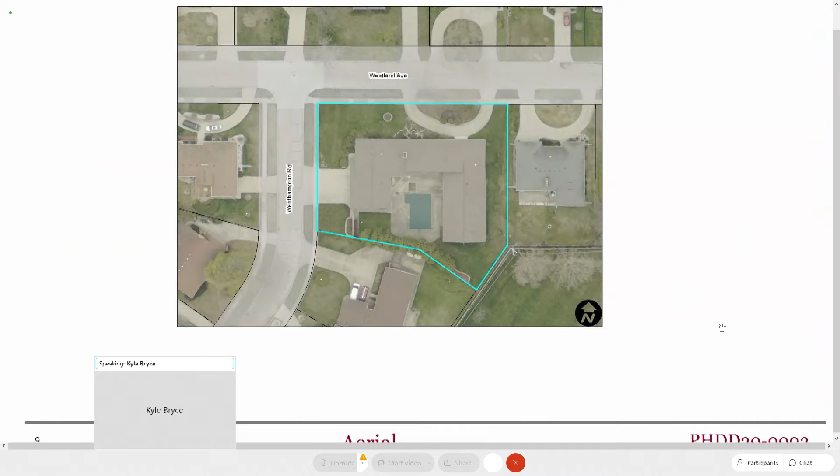Next slide. Here are some existing conditions of the house. Next slide. It's the front of the house.

This house was part of Northland Gardens, which was developed as part of the Northland Mall from J.L. Hudson. The entire neighborhood was platted in 1956 and built out by 1980. The neighborhood itself received National Historic District status due to its outstanding design quality, cohesiveness, and continuing historical integrity to its original mid-century modern design. This particular house, built in 1958, was constructed as one of the largest homes in the neighborhood. It has an asymmetrical U design with a courtyard in-ground pool.

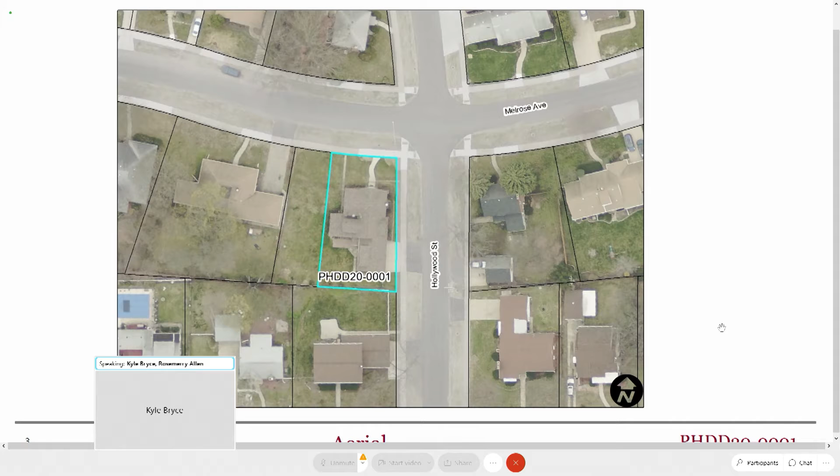Here's a bit of a closer up view of the house, showing it on the corner. Next slide, please. Here are the existing conditions of the Tudor.

Very briefly, this was built during a period of heavy population growth in the Detroit area. The builder, Roscoe Babcock, had a lot of experience constructing modern style homes in the area, things we take for granted today like electrical outlets and garages. But he eyed the Magnolia subdivision, which was in then rural Southfield.

Meanwhile, Don Loftus out of Cleveland was applying modern industrial techniques to home building. He patented the Permanesque style and formed Homes Permanesque of America in 1929. These houses featured steel joists, concrete floors, and steel frame windows. Wood was pretty minimal, and the homes were marketed as fireproof, vermin-proof, and low maintenance, stated to last 200 years. Mr. Babcock secured a Permanesque franchise and started building these homes in the Detroit area.

This house was built in 1930. Next slide, please. It was given a lot of fanfare in the local news, like the Free Press, getting a lot of visitors and press. It was pretty unique and revolutionary for its time.

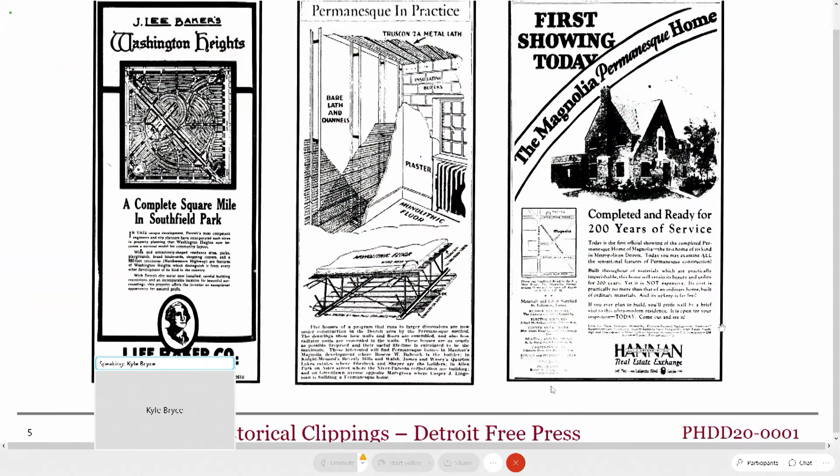Next slide, please. Are there any other questions about this property at this time? Okay, hearing none, I am going to open up the public hearing for this item.

So this is the public hearing for PHDD 20-0001 at 18405 Melrose Avenue. Hello? Hello, sir, you can go ahead with your public comment.

I had questions about this residence being provided with historic designation for a single resident. Is that something the city does frequently?

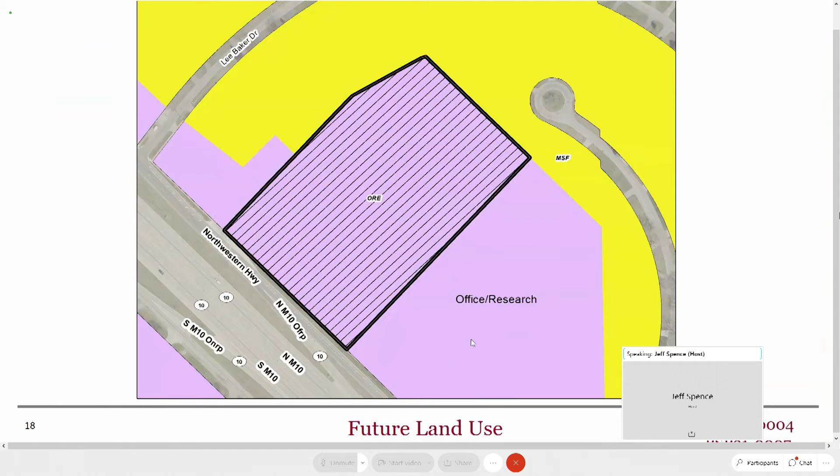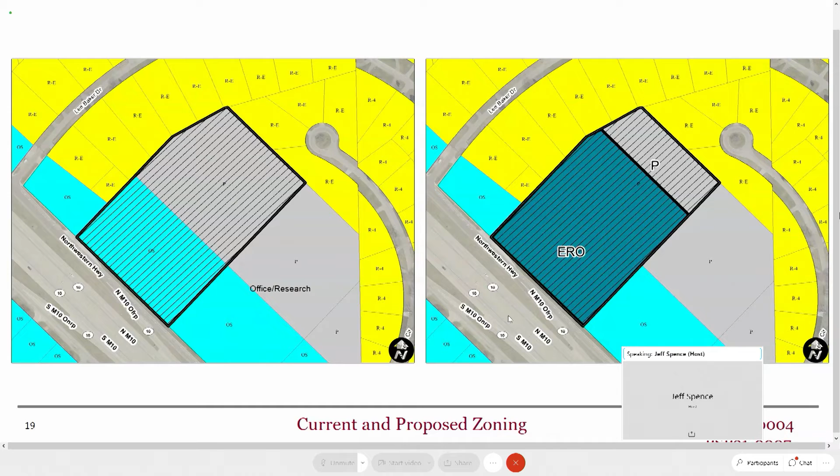Demolition, as noted, is part of this proposal to demo the portion of the existing building on the east side of the property. Then there would be reconstruction, or new construction, of a 43,000 square foot building addition where the parking lot is, basically to the northeast.

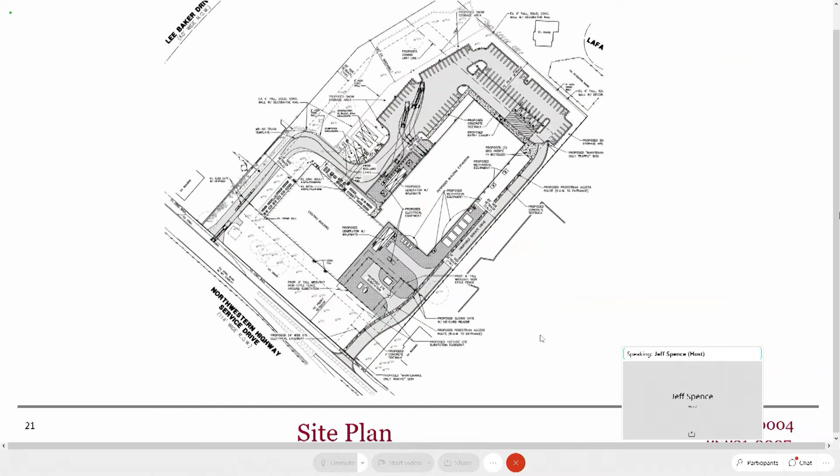The area directly south of where the new existing building would be located has a brand new proposed generator, as well as a DTE substation. Mr. Fisher, when he has his opportunity shortly, can let you know why a DTE substation was required for this particular site.

The landscape plan for the property includes additional trees along the northwest and northeast portions. Since the building is getting closer to the residential area to the northeast, we felt it important to have new landscaping there to serve as an additional buffer, as well as additional trees along Northwestern Highway to help screen the DTE substation. At our meeting a couple weeks ago, there was a concern about being able to see the substation from Northwestern Highway, so the petitioner has added additional landscaping to try to help screen that from the highway.

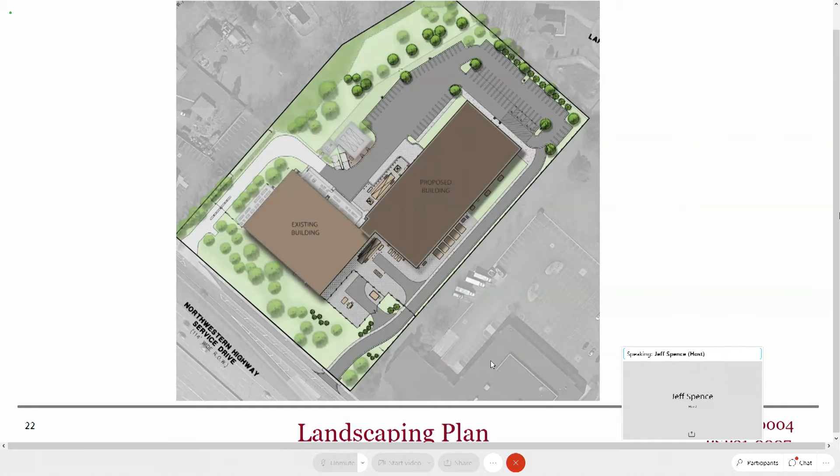Photometric plan that shows the requirement of 0-foot candles at the property line.

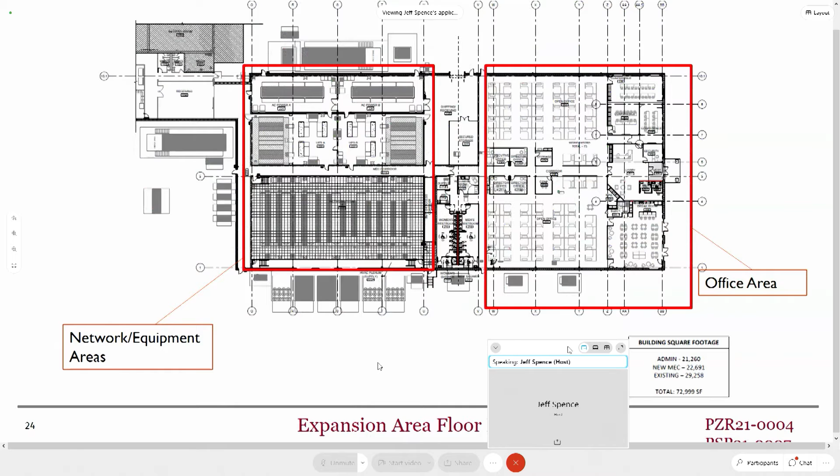The floor plan indicates the expanded administrative offices on the right-hand side, with the new electrical equipment and network equipment to the left.

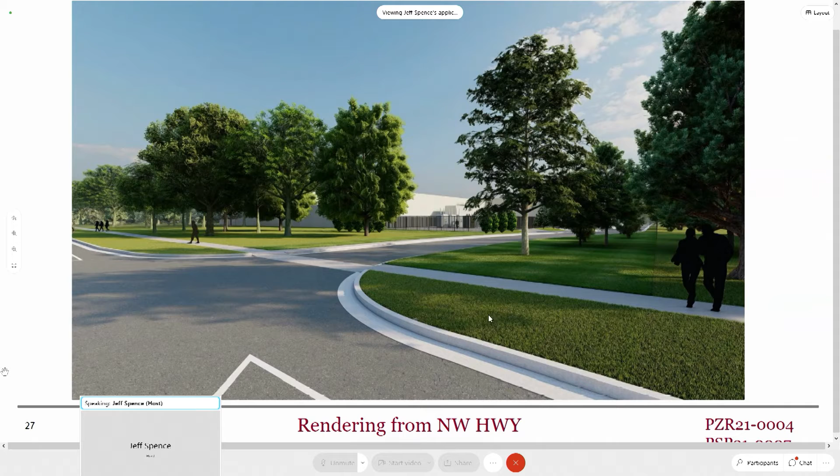Elevations, and then a rendering of the building. This is basically looking north and northwest. You can see where the substation would be in this particular area, with additional plantings to help try and screen that.

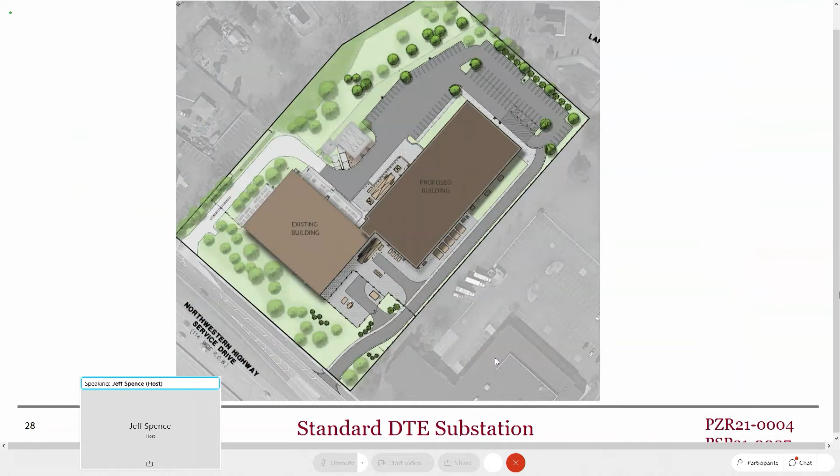And with that, as noted, Mr. Scott Fisher is on the line this evening. Scott, if you would like to further give an overview of this project, that would be helpful.

Thank you, Jeff. Sorry about the delay, just had to get off of mute. Good evening, Planning Commission, happy to be in front of you again this evening. As Mr. Spence mentioned, my name is Scott Fisher. I am with Midwestern Consulting, who is the civil engineer and planner for Verizon Wireless on this project.

I will probably reiterate a lot of items we went over a couple weeks ago, but wanted to do that as a refresher for both yourselves and any of the public that may be watching. As you know, Verizon Wireless is one of the largest wireless telecommunication companies in the country and is an essential service throughout the country due to its support of the emergency 911 system.

The primary purpose behind this project is that over the past decade or so, the use of data on cell phones has significantly increased compared to the original intent, which was to make a phone call. As a result of that increased data usage, there's a need for a lot more computers to handle all of that load.

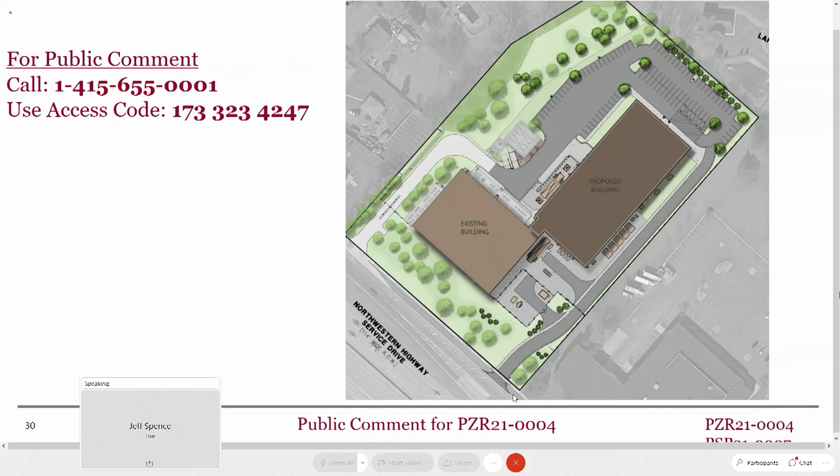Okay, if there's no additional questions or comments on the rezoning, we'll entertain a motion. If you may, sir, let me read the planner's recommendation first.

Oh yeah, that's a great idea. Thank you. So the planning department does recommend favorable recommendation of the proposal to rezone 7.13 acres of land from OS office service and P vehicular parking to 6.21 acres of ERO education research office and 0.92 acres of P vehicular parking for the following reasons: the Southfield Comprehensive Master Plan indicates office and research for this property, the change in zoning would be compatible with and similar to existing adjacent zonings and land uses, and the proposal is in accordance with the standards for rezoning for the property.

All right, thank you. With that recommendation, if there is any other discussion, go ahead, or we'll entertain a motion at this time. To the chair, Commissioner Martin. Yes, I'd like to propose approval of PZR 21-0004 for rezoning.

Commissioner Culpepper, support. Okay, we've got a favorable recommendation by Commissioner Martin, supported by Commissioner Culpepper. We have a roll call vote, please. Yes, sir. Mr. Martin, approve. Mr. Willis, support. Mr. Culpepper, yes. And Mr. Griffiths, yes. All right, Mr. Chairman, you have a favorable recommendation for PZR 21-0004.

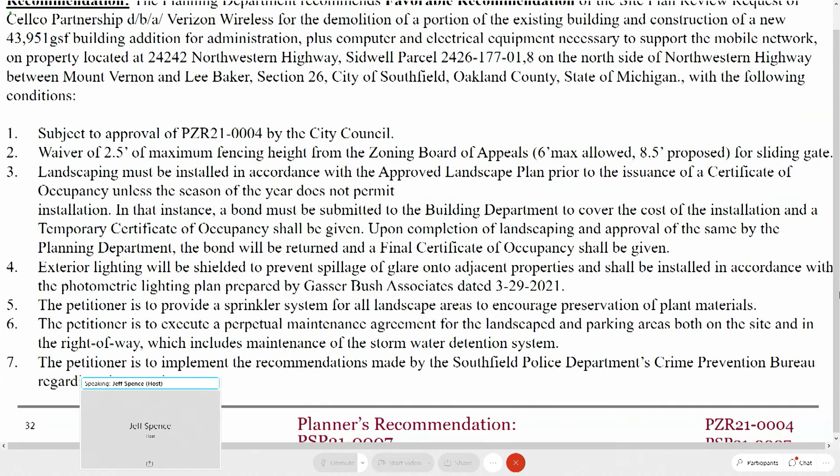Approval of the site plan and/or building elevations represented herein does not constitute nor guarantee approval for signage. Separate approval and sign permits must be obtained from the building department for any proposed sign. Bike rack shall be installed in accordance with Article 4, Section 5.29, Paragraph 12. In lieu of providing a required work of art on the site, the owner has decided to donate $25,000 to the Public Art Fund. And the building shall be constructed in accordance with the submitted elevations shown on sheet A200. And that concludes this presentation.

Thank you. Well, I'll entertain a motion. Through the chair, this is Commissioner Rob Willis. Yes. I've moved for favorable approval of the site plan for PSP 21-0007.

Commissioner Culpepper, support. Okay, just a point of clarification - do we have to add the condition of the fence, or can we handle that? The fence height? I did not read that into the record, so you do not have to do anything with the fence.

So remind me again, who made the motion and who supported? Motion by Mr. Willis, supported by Commissioner Culpepper. Okay, thank you. May I have a roll call vote, please? Mr. Willis, yes. Mr. Culpepper, yes. Mr. Martin, yes. And Mr. Griffiths, yes.

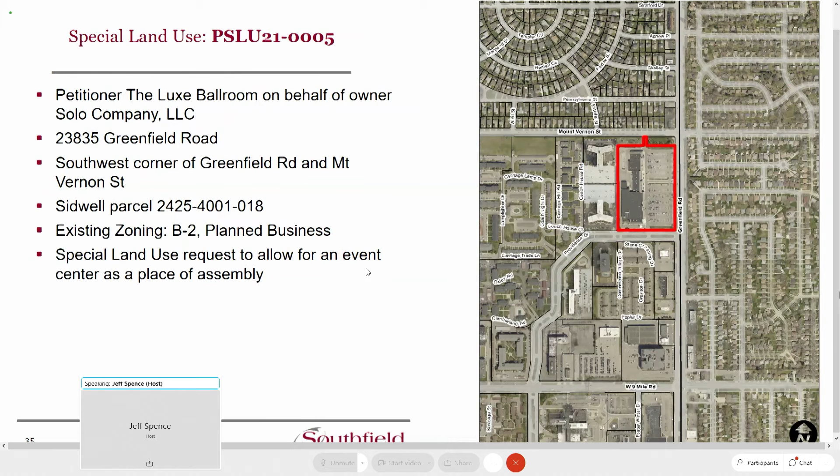The unit address of the ballroom where this special land use is being proposed is 23835 Greenfield Road. This is a unit within the existing Cornerstone Plaza Shopping Center, located on the southwest corner of Greenfield Road and Mount Vernon. Sidwell parcel 2425-4001-018. Existing zoning is B-2 Planned Business, and the special land use request is to allow for an event center as a place of assembly within the existing shopping center.

This image gives you an idea of its location in relationship to 9 Mile, Greenfield Road, and Mount Vernon. Here's a closer look at the property itself. The zoning and future land use is within the Downtown Development Authority area, and again, the property is zoned B-2 Planned Business.

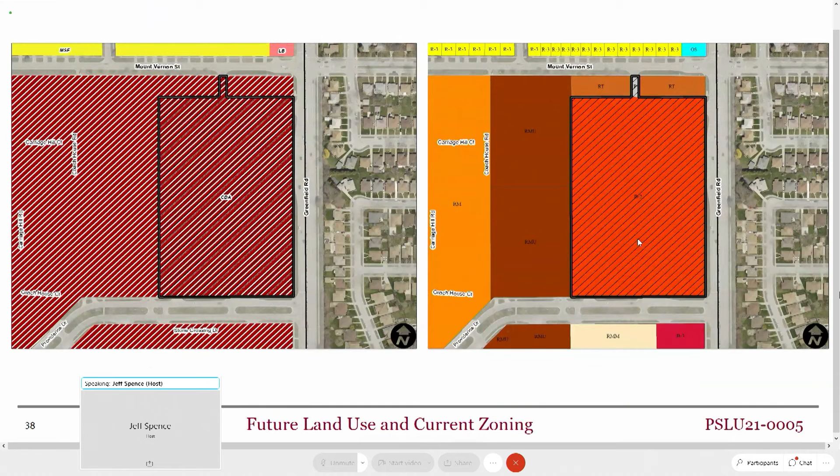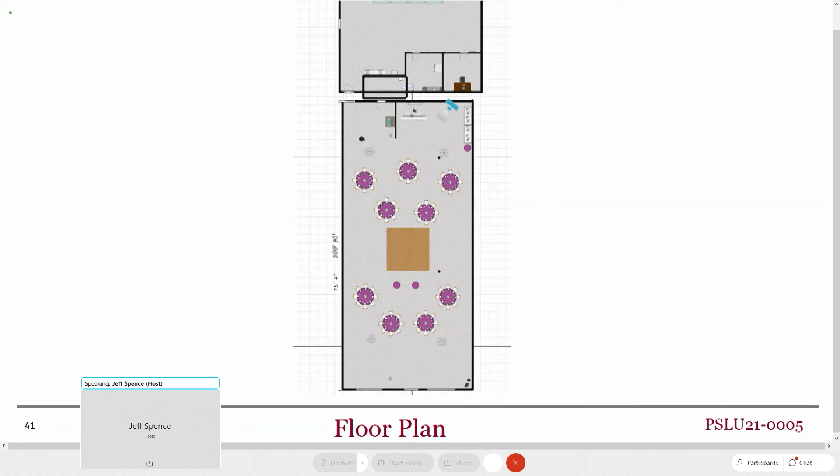We do have the petitioner, Ms. Fletcher, on the phone, as well as the owner of the shopping center, Fred Nager. So, Ms. Fletcher, if you'd like to add anything additional to this proposal, you're free to do that at this time.

Thank you, Jeff. Again, my name is Denthea Fletcher. I am the owner and lead operator at the Lux Ballroom. Thank you guys again for the opportunity to present my ideas for bringing my business to the city of Southfield. Just a couple of things about the Lux Ballroom and how we'll be operating - there's a couple of bases we covered in the previous meeting that I'll go over again so the public who are joining us now are aware.

So our days and hours of operation will be Monday through Friday from 4 p.m. until 12 a.m., and on weekends, Saturday and Sunday, from 9 a.m. to 12 a.m. We anticipate our venue capacity to be 100 people.

We do have security that will be in attendance at every event. We have a security company we've used in the past, so we'll continue service with them. There's no money stored on site - all of our bookings and payments are accepted through our website, so no money will be stored at the venue at all. This will be our one and only location in the southeastern Michigan area; our previous location in Farmington Hills, we're no longer operating from.

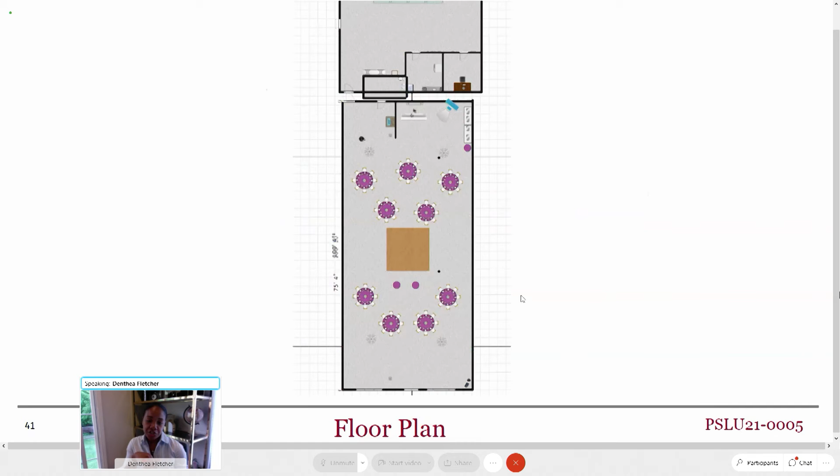Parking will be allowed throughout the event. For larger events, we are going to provide valet services and instruct the valet company to park the cars furthest from the front of the parking lot, just to leave those areas up front for CVS, the DaVita dialysis, and the restaurants that are also next to us.

As far as security issues and how we'll handle them, as mentioned before, we will have on-site security guards at every event, and then of course I'll work with them. When issues arise that require law enforcement, we'll involve them when necessary. So those were pretty much the basics of how we'll be operating.

I'm happy to answer any other questions that you might have, or any questions from the public.

And Mr. Chairman, if I may, I believe that Mr. Alicevis, who's the director of the Downtown Development Authority, is online as well. Al, if you are online, if you'd like to make a couple of comments. Yes, thank you Jeff. Good evening, commissioners.

To add to my additional comments from last time we met, on May the 21st this project was introduced to the DDA Board of Directors. They moved ahead with a unanimous recommendation to move this project before you this evening, with the hope that the commissioners would approve this going forward. As I mentioned, Fred Nager has been a longtime supporter of the DDA in the city, and in particular the district, and this would certainly go a long ways in helping him to begin filling some of the vacant space that he has over at his malls. So thank you very much.

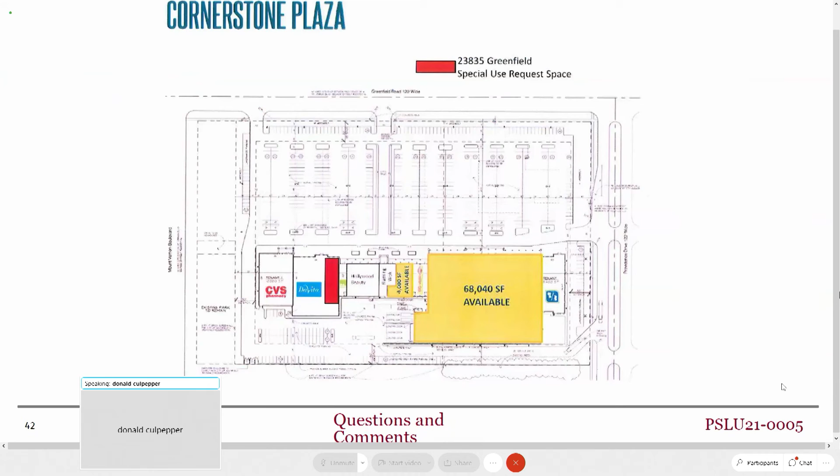Ms. Fletcher, let me say, great presentation. I think this project does meet the special land use with all the requirements. I think you covered a wide range of activities or people that you can service in that facility. And your hours are great, 4 to 12 Monday through Friday, 9 to 12 on Saturday and Sunday. I like your security, you got people on site to take care of any issues between you and them, and if anything goes out of hand, you can contact the police.

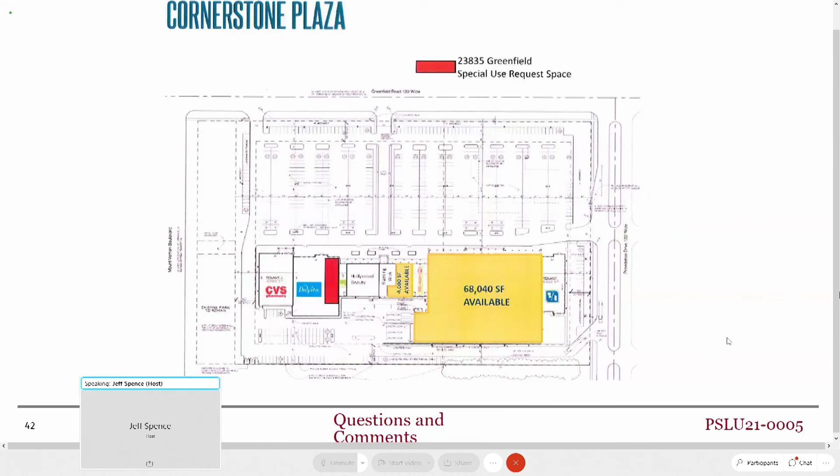If I may, I'd like to chime in and say great job, Ms. Fletcher. Thank you for thinking of Southfield, the center of it all. I'm excited about what you plan on doing, and I just think it's really great what you have. You're a young woman, and I think you'll be a great addition, some diversity as far as age, as a business coming into our city. I think you'll do a great job. I look forward to sending people to your venue as well as supporting it myself. Thank you very much. You're welcome.

Thank you. Any other comments from the commission? I'll just say, I think the slide with the overall center floor plan and parking shows that this is a relatively small space, but it's a good use. It's going to bring traffic at different hours to the center, probably busier when the center was quieter, but it's still a very large site with plenty of parking and traffic flow. I think it's a good location for this type of use, so I would be in support.

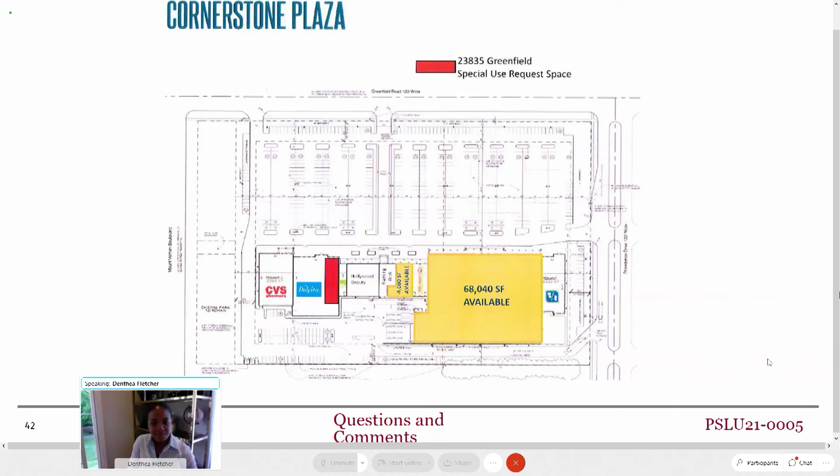All right, with that, we have a recommendation from staff. Yes, thank you, Mr. Chairman. With regard to this particular item, PSLU 21-0005, the Planning Department does recommend favorable recommendation for the special use of the Lux Ballroom on behalf of the owner, Solo Company LLC, to allow for an event center as a place of assembly, located at 23835 Greenfield Road, Sidwell parcel 2425401018, with the following conditions.

Hours of operation shall be limited to 4 p.m. to midnight Monday through Friday, and 9 a.m. to midnight on Saturday and Sunday. The special use, with any conditions recommended by the Planning Department and Planning Commission, will be of such size and character that it will be in harmony with the appropriate and orderly development of the B2 Planned Business District. The location, size, intensity, and periods of operation of the proposed use is designed to eliminate any possible nuisance likely to emanate therefrom, which might be adverse to occupants of any nearby permitted use.

The proposed use is in accord with the spirit and purpose of the chapter and is not inconsistent with or contrary to the objectives sought to be accomplished by this chapter and principles of sound planning. The proposed use is of such character that vehicular traffic generated will not have an adverse effect or be detrimental to the surrounding land uses or adjacent thoroughfares. The proposed use is of such character, intensity, and arranged on the site so as to eliminate any adverse effects resulting from noise, dust, dirt, glare, odor, or fumes. The proposed use will not be adverse to the promotion of the health, safety, and welfare of the community, and is designed and operated so as to provide security and safety to employees and the general public. That concludes this report.